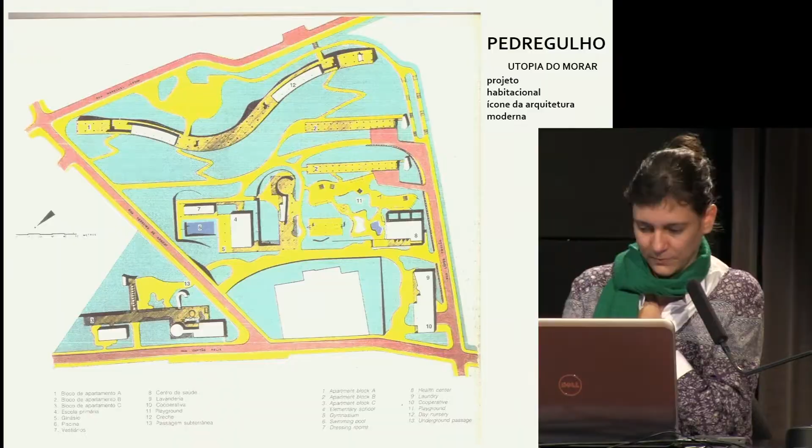In the original project, which was designed by an architect called Affonso Eduardo Reidy. The second name, as I said, this means

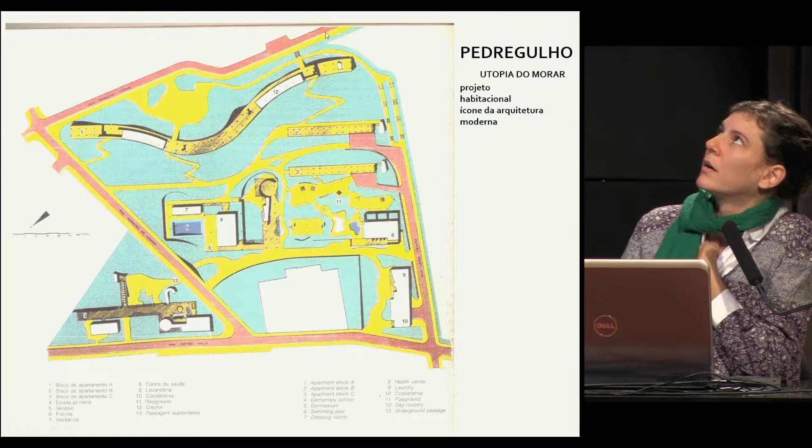It's those buildings, and it's the name given by the residents and users. Minhocão is because of the shape, and São Cristóvão is the district where it is, the neighborhood where it's located.

There are 2 big estates of this kind in Rio. There's São Cristóvão, which is this one, and that's why it's called Cristóvão, in order to distinguish it from the other.

And the third name, Conjunto, is the official name registered by the municipality, which I'll explain later. So Pedregulho is the original project.

The architect is a very well-known modern Brazilian architect. He produced some very fine buildings, in my opinion.

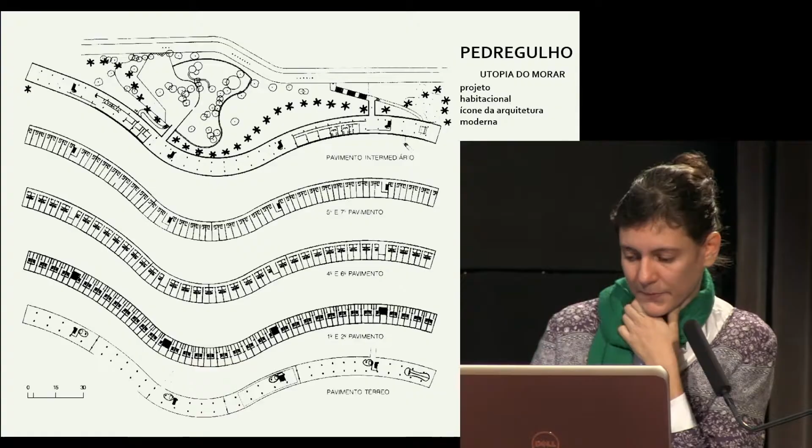And this project was designed in 1946, at the same time as the projects for Marseille, which are very well known, I think, in France. So this project has 3

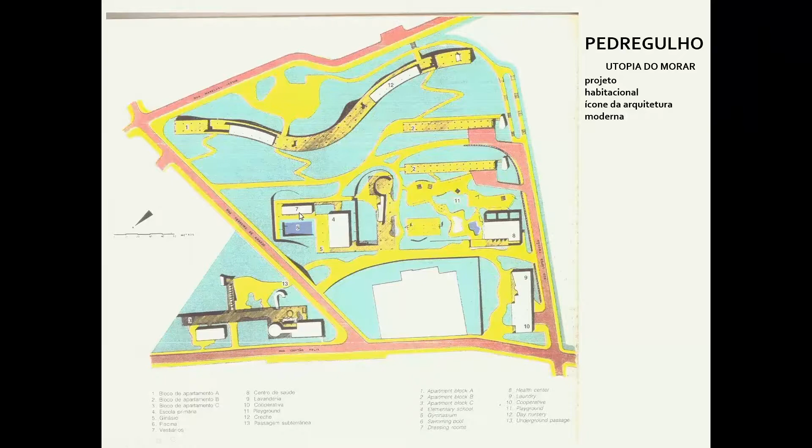residential bars. There's the first and then 2 small blocks or bars behind. All 3 residential. And there's also a laundry, which is here, a health center, a crèche, and a gymnasium for sport. They are duplex apartments.

What I find important to say here is that Pedregulho was a big modern project of social adaptation. Now, in parenthesis, there are researchers who say that the moderns are the best-known architects who developed the ideal of modernism, the ideal of the modern and utopia. Modernists and modernism are the proliferation of this ideal, the massification around big estates.

Pedregulho was built by the municipal architect. It was directly built by the state.

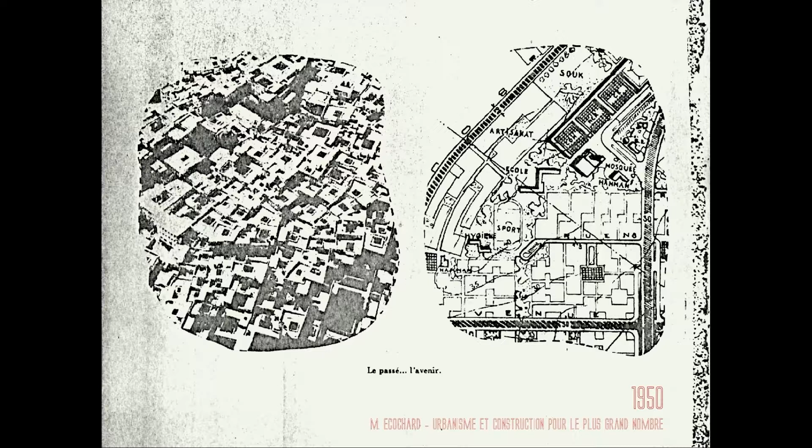He obviously studied the past in order to plan for the future. He could see what happened in the Medina to plan what would subsequently be constructed, both in terms of the home units, but also for wider districts.

He also developed a zoning pattern in order to plan for this public housing.

There's a very dense population. You had 8 or 10 people living in an apartment at the time. And the Medina no longer had space for such a large population, hence the creation of all these peripheral districts. This Écochard plan was obviously much disputed, because people like disputing things, so he wasn't that well liked by the population.

So with this introduction, you can see that within 1 century, the city has developed from a village to a megacity. And even today, after this very fast development, this fast development continues. So now let's look more closely at our site.

So, which is located right on the tip, as it's called. It's called the elbow, Casablanca elbow.

The site fell within the administrative boundaries in 1912, at the same time as the protectorate.

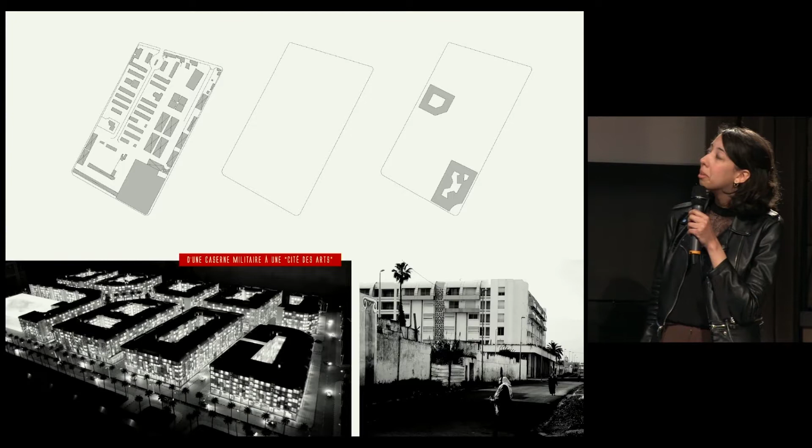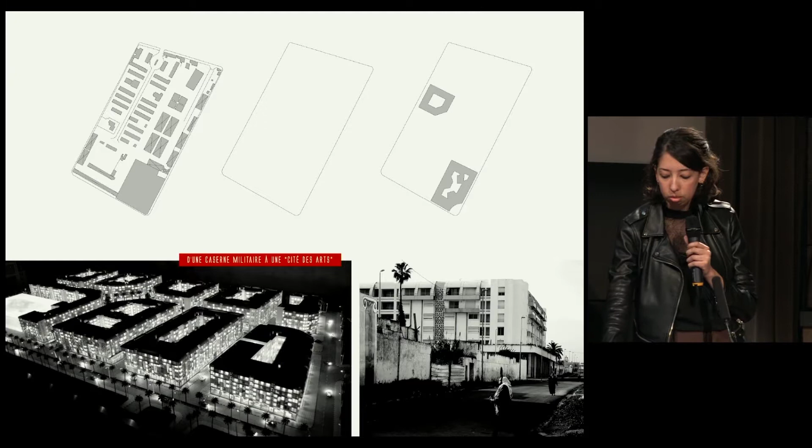And here on the space where the military barracks was, we have this, which is a genuine real estate fiasco. 2 of the 9 buildings have been completed. It's called the Cité des Arts, City of the Arts, which corresponds to nothing of what is planned or is there. The quality of this estate is very much inferior to the one I will show you subsequently, which is much more aerated and open.

So now we'll do a close-up to the central scale of the estate. Initially, this district was intended for a so-called Jewish population, Israelite as they were called at the time. There were several projects on the site, but this is not what was actually built - I just thought I'd show you that there were several ideas for the site.

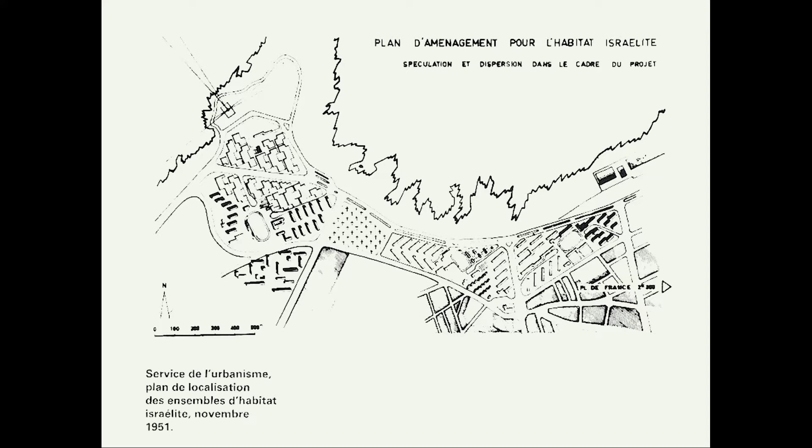It began with this block here, which was on the lighthouse site in 1950, which was a kind of prototype for this kind of housing. And ultimately it's quite different from what eventually came to be built. It's the only one that has no outside staircase.

Then the rest of the land was bought between 1952 and 1953, and the general construction began. The initial block looks like this. There are entries on the edges which were supposed to be public, but were actually appropriated subsequently. So very, very airy...

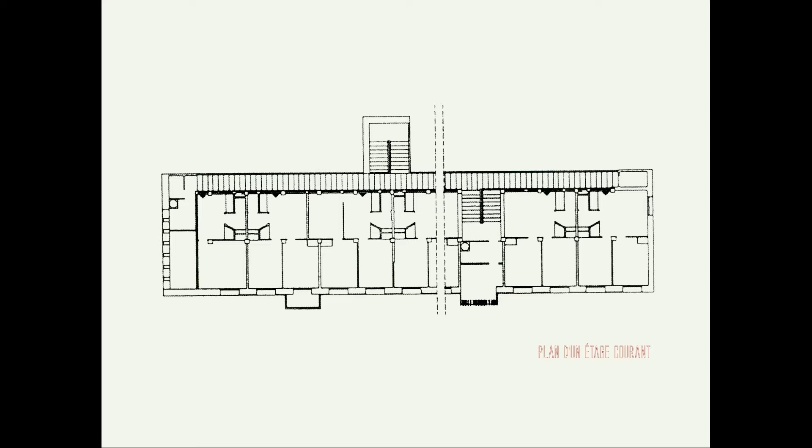agreeable apartments, which people really loved, and are still very popular. That's a standard apartment layout. So we can see what was the initial housing program.

We see the emergence of the first amenities. There was supposed to be a synagogue, a school and a cinema, but given that the recipients of the site evolved over time, the synagogue was not built - just the school and the cinema.

In the 1960s, there was a Muslim working class population that began to move into the estate, not the Jewish population. So they demolished the houses of the people who were living there and rehoused them in other districts. In 1956, the term Israelite housing was changed to economic housing, which is more inclusive rather than ethnic and cultural.

In 1980, when the Muslim population was well settled, we see that a mosque had replaced the initially planned football stadium. Many more schools than before, and the amenities followed the desires of the inhabitants. This is a view from the mosque - from here we can see the whole estate.

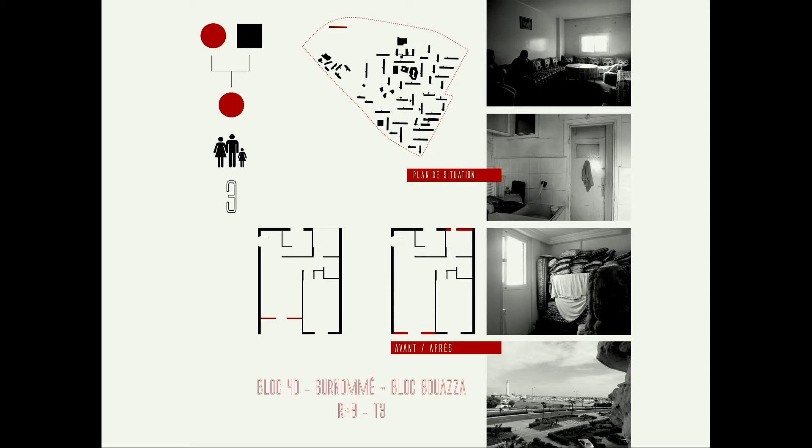It's the block that I presented to you before. Even though these apartments are quite large compared to others, people nevertheless annex everything they can in order to increase the space available to them.

What we also did in situ was survey the day-to-day activity, and based on the density of the apartments, we could guess what people do at night time. The dimensions of the apartment relative to the number of people living there were quite generous.

So what we see afterwards is that there are different categories of space. We can see their proximity to the sea, even though 3 people live in this apartment because they have a child. This space is dedicated to the accumulation of mattresses which are unfolded when the family come in summertime to stay. So instead of having a room for the child, they preferred to keep a kind of latent hospitality space, which we found in many apartments we visited.

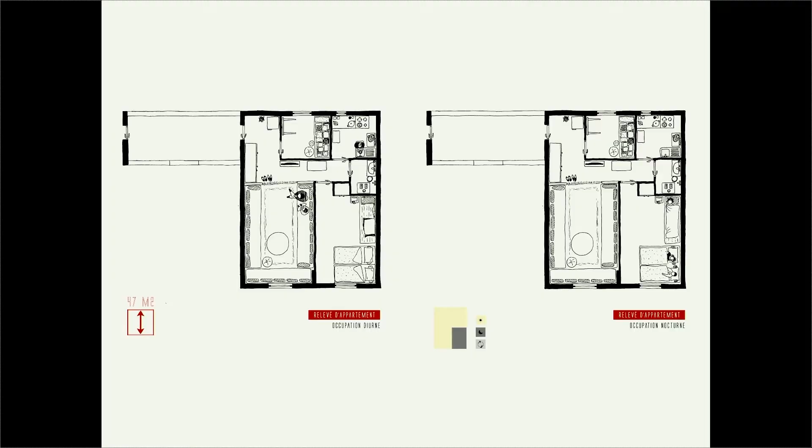This is the second building, which is one of the standard blocks. The laundry has been annexed and is now used as a kitchen, and the galleries have kind of been privatized, so nobody can get through to the end.

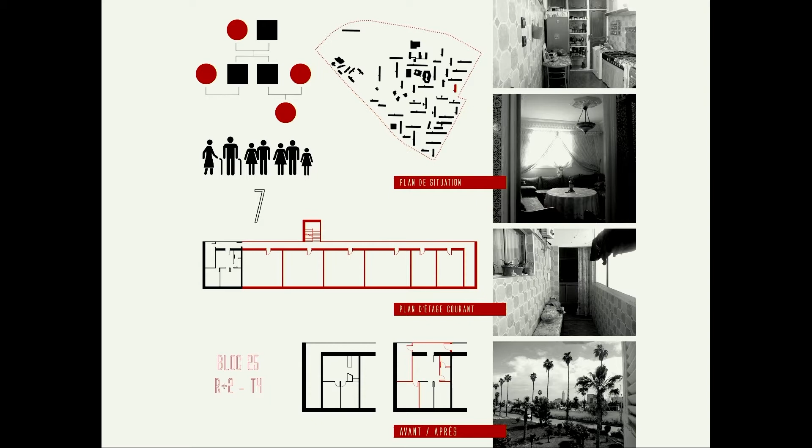Here the density is much greater. You have 7 people in a 4-room apartment. It's quite a strange typology because the lounges are changed into hospitality spaces, converted into bedrooms in the evenings. So these rooms have a double function during day and night, a dual function, so it's a very fine view.

What we also saw on this site are these spaces which have a kind of conditional liberty because we know that they're free, but we don't know how long they're going to stay that way. We had a lot of questions when we arrived on site. For the moment, these spaces remain unoccupied in a sense. There's no construction on them because a lot of events happen there, festivals and major events at both national and local level, which keep the space free. But I guess there's a lot of land pressure. You can see that.

With a marina arriving, the value of these kinds of plots is rising very fast. But every day the local people are always using these spaces, and obviously they're very attached to this space, which means that this land here is still free.

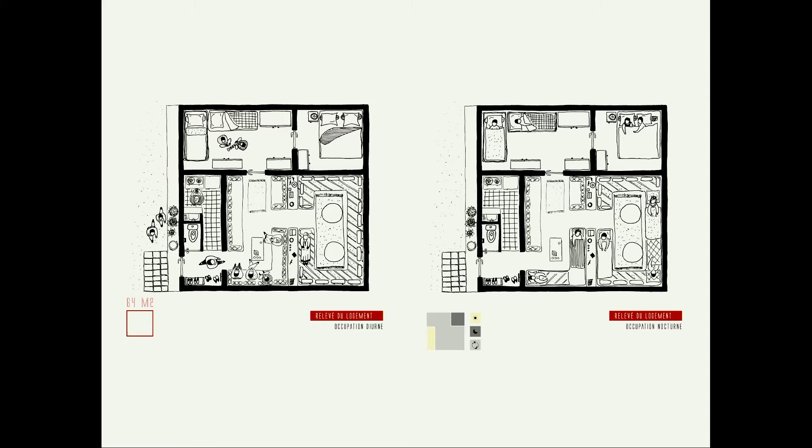In this 84 m² layout, you have 11 people living there, with multiple generations and multiple wings of the family, so everything is here. The whole apartment is transformed from day to night. It's a highly modular space which can employ different functions during the day and at night.

There's a plan to rehouse these people on the grounds that their living conditions are unhygienic, with the aim of rehousing them in Nassim. The government plan has 3 options: either rehouse people, restructure the slum areas and give them proper urban status, or allocate social housing, or relocation — essentially giving people land to build on themselves, equivalent to 2,500 euros, for people to gradually build their own houses.

But that land is at the other end of the city, so obviously they don't agree, because they work in the street. They have additional transport costs, and they lose their source of income, which might be guarding nearby villas or other local work. So as soon as they're rehoused, they lose their whole revenue and social structure.

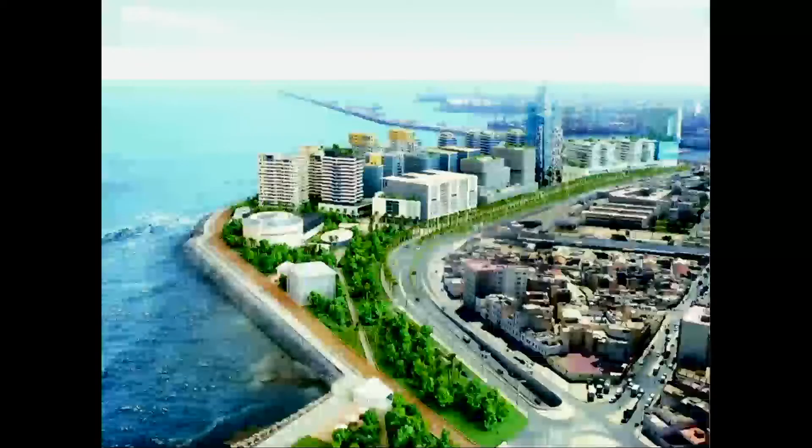All this rehousing is due to the arrival of a magnificent project — this project, the Casablanca Marina. I'm afraid it hurts my eyes personally. I'm sorry, but that's the reality of what people build today, and the investments are obviously colossal.

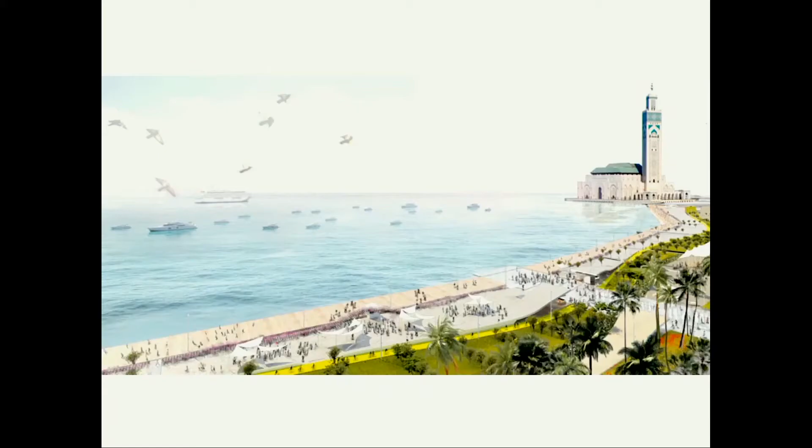There's another project, which began in 2016, linked to connecting the mosque to the lighthouse.

So to conclude, the decision makers take advantage of precariousness as a source of arguments. To relocate these inhabitants runs counter to the spirit of the place — what they want to do is destroy this sociability in this site.

Modernity has left indelible traces in Casablanca, a little everywhere, reflecting the antagonistic drives between experience and plan, reality and intention. And it's these 37 buildings, from 2014, which are gradually shifted, moved, and employed differently.